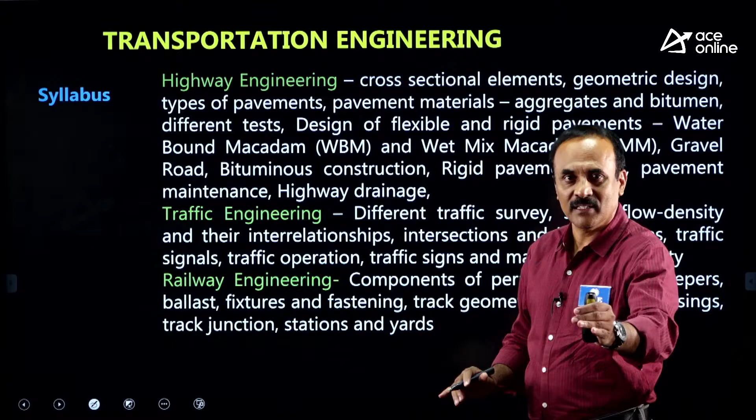Today we will discuss transportation in a nutshell. We will revise the important topics for SSC JE 24. Transportation has very good weightage for SSC JE. It is a simple subject, easy to score marks without any complication or difficulty. Compared to structural subjects, even among non-structural subjects, transportation is one of the easiest.

There may be specification and theory based questions, and a few numericals will come. Sometimes numericals may be bouncers, as a calculator cannot be used in the exam hall. So you have to be careful and skip the critical questions sometimes.

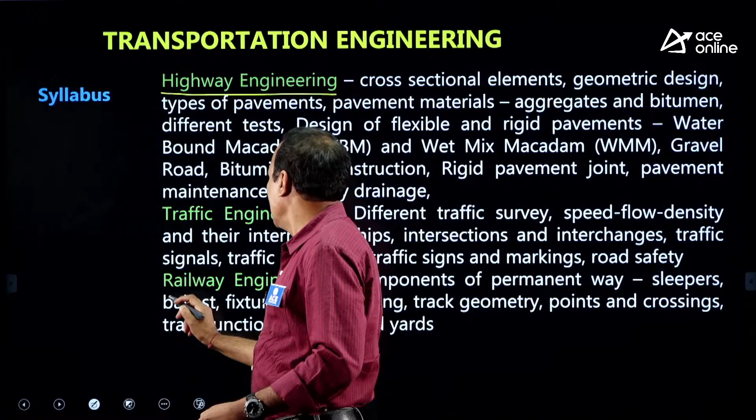Coming to the syllabus, it has highway engineering and railway engineering. Actually, traffic also comes under highway. In highway engineering we have geometric design, flexible and rigid pavement design, and highway materials. In traffic engineering, there may be 2-3 questions, as it is separately given.

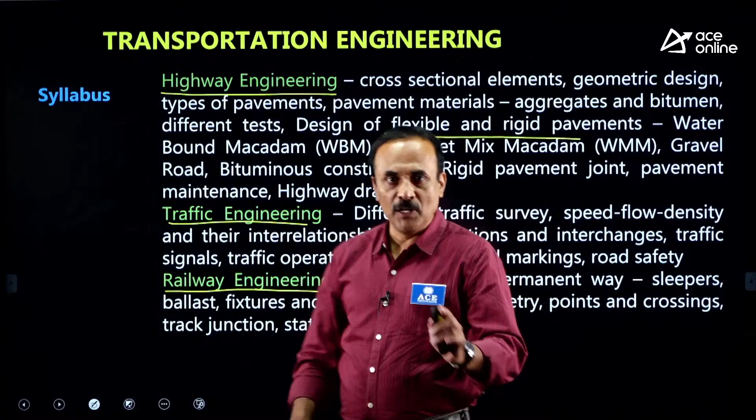Coming to railway, only the simple parts are given in our syllabus: concept of permanent way, sleepers, fixtures, track geometry. Geometric design is most important for us, and points and crossings. In the present session we will talk about highway completely.

Coming to the exam, SSC JE is a completely objective oriented exam, so you have to prepare in the same way. The level of objective questions will be slightly lower than the ESE prelims exam. There you have multiple choice questions, here also, but the level will be lower. It is slightly above local service commission exams and well below ESE prelims, because it is SSC junior engineers.

Junior engineer is a diploma based level, so you need to prepare as per the diploma syllabus. Coming to the weightages in different sets, in 2019 transportation had 7, 11, 9, approximately 10 marks, and in 2021 8, 8, 7.

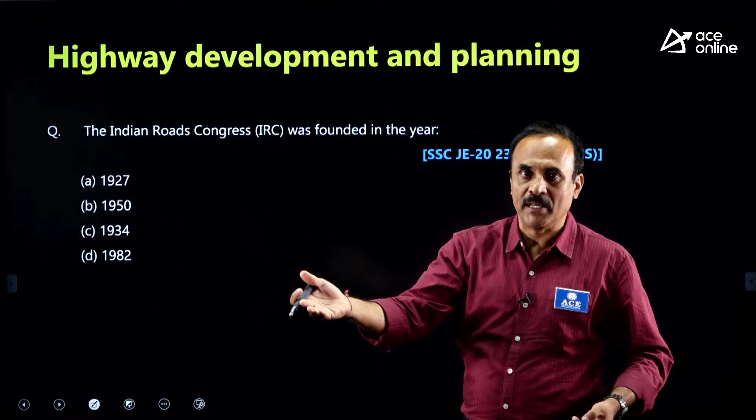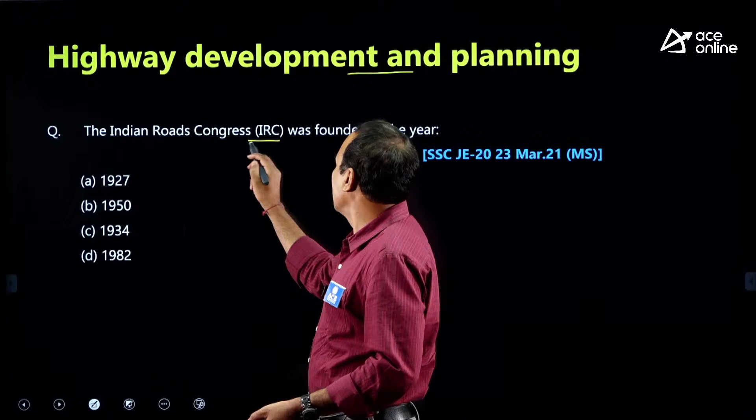First, highway development and planning, which comes under geometric design. When was the Indian Roads Congress (IRC) founded? Such year-wise facts are important, especially in highway geometric design and historical development. The Indian Roads Congress is an offshoot of the Jayakar committee. The Jayakar committee was 20 years before independence: 1947, so 37, 27.

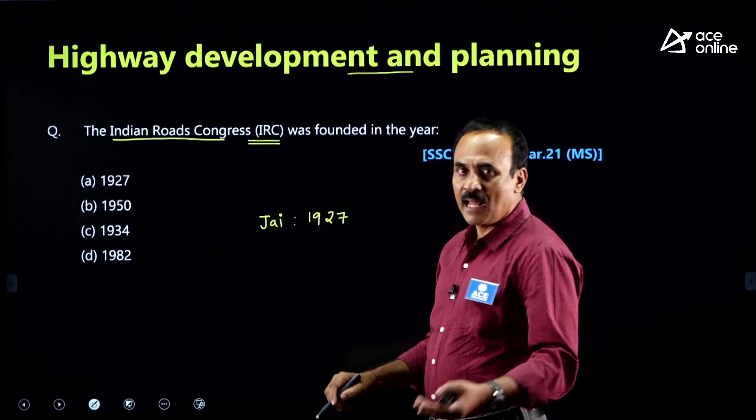The Jayakar committee gave mainly 3 recommendations. One is CRF, 2 years after, 4 years after the Jayakar committee, 1931. Next, IRC is the second recommendation, 7 years after the Jayakar committee: 27, 28, 29, 30, 31, 32, 33, 34, so 1934.

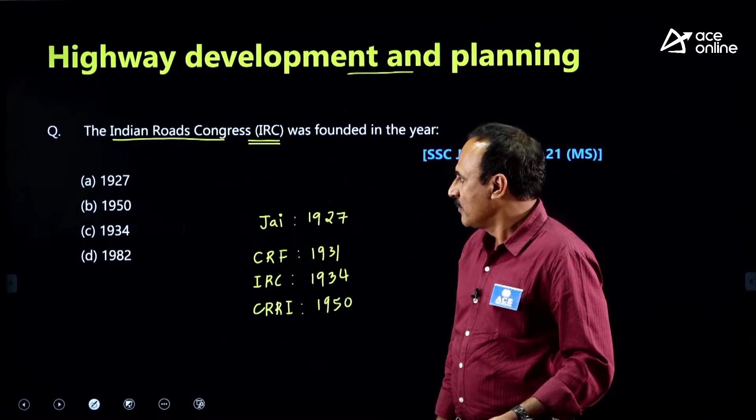Next, CRRI was also recommended by the Jayakar committee, established in 1950, the year we became a republic, 26th January, remember that. These years are very important; try to remember them. IRC is 1934; try to remember in a logical manner.

Sometimes they may ask the years also. The Lucknow plan ended in 2001, 20 years back means 1981, 91, 2001. The Mumbai plan, second 20-year plan, ended 1981, so 1961 to 81, and the Nagpur plan ended 1961, but it completed in just 18 years.

It had to complete in 1963 but completed in 61. Go back 20 years from 63: 53, 43, 1943. Between 1943 and 61 India got independence, people worked a lot and completed the target in just 18 years. Sometimes they ask these years, be careful. Lucknow plan ended in 2001.

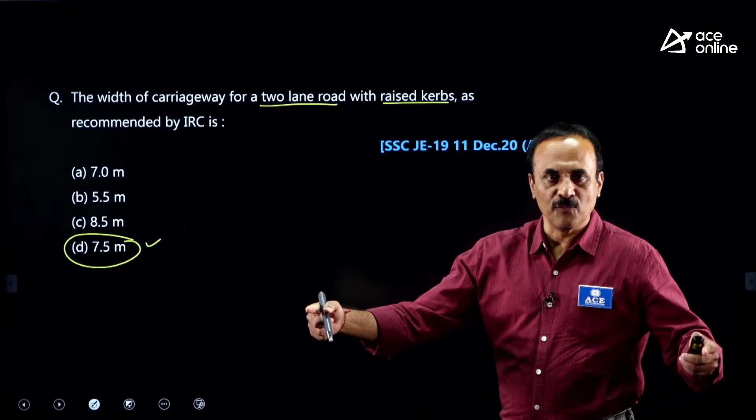Next, coming to this question, width of carriageway of a 2-lane road with raised curbs. 2-lane road with raised curbs, generally we use it on city roads with footpath, or otherwise we use it over bridges where you have the parapet wall. In that case, the width of 2-lane road is 7.5 meter. Actual 2-lane road width is 7 meter, but here as there is no access to the shoulder, we are using 0.5 meter extra.

Now, coming to this question, the sight distance is defined as what? We have different types of sight distances: stopping, overtaking, intermediate sight distance, and headlight sight distance. So, what is actually sight distance? Length of the roadway a driver can see ahead at any particular time. We go by process of elimination. Read B also, nautical distance for ships. Sight distance is nowhere related to nautical distances and nowhere related to ships, it is on road actually.

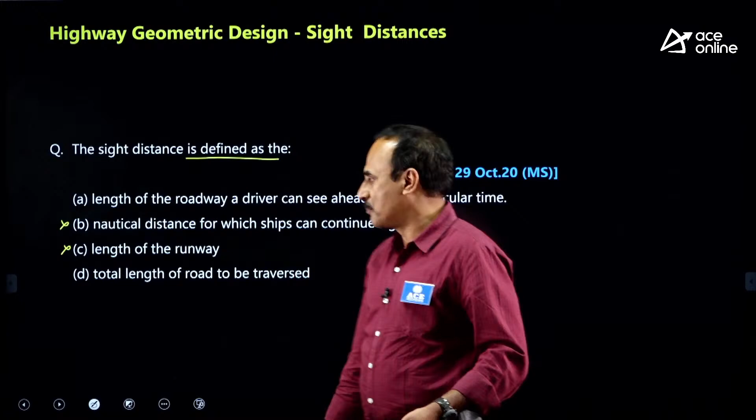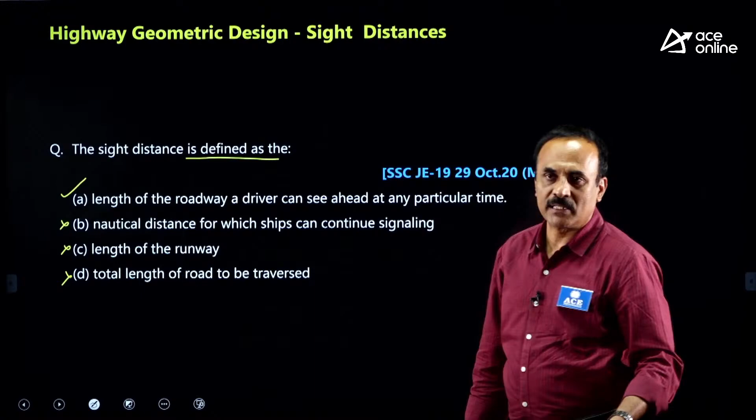Length of the runway, it is nowhere related to the airport. Now, coming to option D, total length of the road to be traversed, nowhere related to surveying. So, if you eliminate the 3 options, the best option is option A, length of the roadway a driver can see ahead at any particular point of time. So, actually the clear visible distance ahead of the driver for various operations on the road is sight distance.

Now, coming to this numerical, actually this numerical is a bouncer, takes time to solve it. So, read the question: 2 cars are moving in opposite directions with speeds 25 meter per second and 20 meter per second respectively. The total reaction time of the driver is 2.5 seconds. The coefficient of longitudinal friction is 0.35. Then what must be the minimum sight distance required to avoid head-on collision?

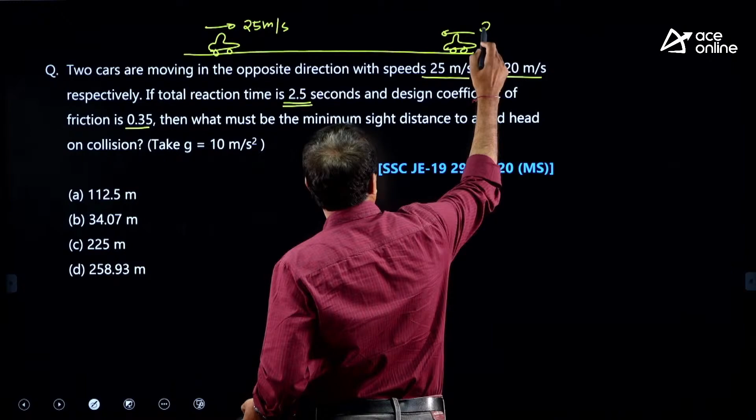2 cars are moving on the road. One car is moving like this, with a speed of say 25 meter per second, another car coming in the opposite direction with 20 meter per second speed. To avoid accident, both the cars must stop. This car should stop within a distance equal to SSD 1. This car should stop within a distance equal to SSD 2. So, total distance required to avoid head-on collision is SSD 1 plus SSD 2.

So, SSD 1 is nothing but lag distance plus braking distance. As the speed is given in meter per second, directly you can use Vt plus V square by 2gf, lag distance plus braking distance. So, here velocity of vehicle 1 is 25, reaction time is given as 2.5, plus 25 square by 2 into g, you can round it off to 10 meter per second square. f is given as 0.35.

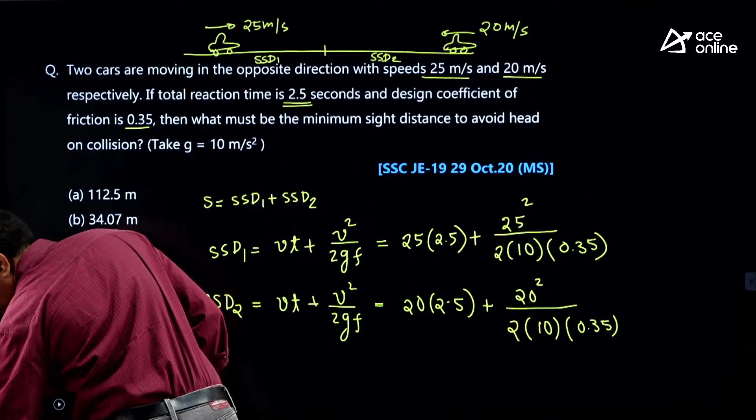In the same way, for the other vehicle coming in the opposite direction, SSD 2 is again the same equation, substitute all the data, but only the velocity is changing here, 20 into 2.5, plus 20 square by 2g; actual acceleration due to gravity is 9.81, I am using 10 for easy simplification. So, if you add it and simplify, it would be 258.93 meter. So, answer is option D.

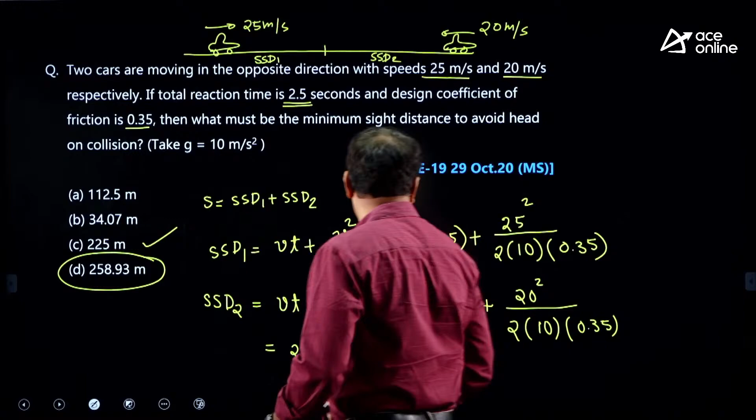But to simplify this without calculator is a nightmare. Such lengthy questions without calculation, it is difficult to simplify. In that case, you just leave the question, jump to the next question.

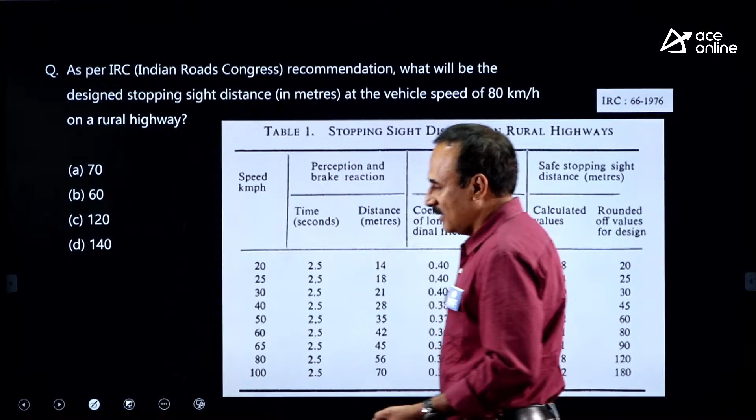Now, coming to the next question, as per IRC, what will be the design stopping sight distance in meter for a vehicle of speed 80 km/h on rural highway? This is again memory oriented, as per IRC, Indian Roads Congress. Indian Roads Congress has given the SSDs for different speeds that you need to remember. That is given in a table form in IRC 66, 1976. Remembering this table is difficult, but try to remember things like this.

Speed 20 km/h, last column, the rounded values of safe stopping sight distance: 20 km/h, 20 meter; 25, 25; 30, 30; 40 km/h, slightly different here. For 40 km/h speed, 45 meter is required. For 50 km/h, 60 required. For 60, 80; 65, 90; 80, 120; 100, 180. So, presently they are asking for 80 km/h speed. 80 km/h speed means 120 meter. So, answer is option C.

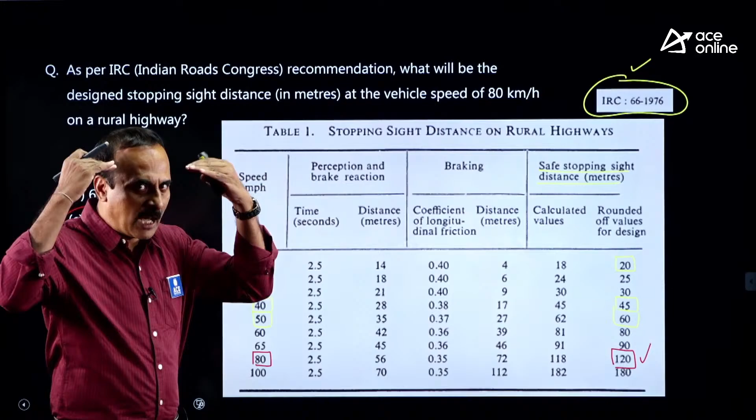This is a very common question. If you have good memory and space to store things in your brain, try to memorize it. If space is not there, delete unnecessary things from your brain and try to memorize this, it's important for exams. Especially in SSC JE exams and all, these memory oriented questions are important for us.

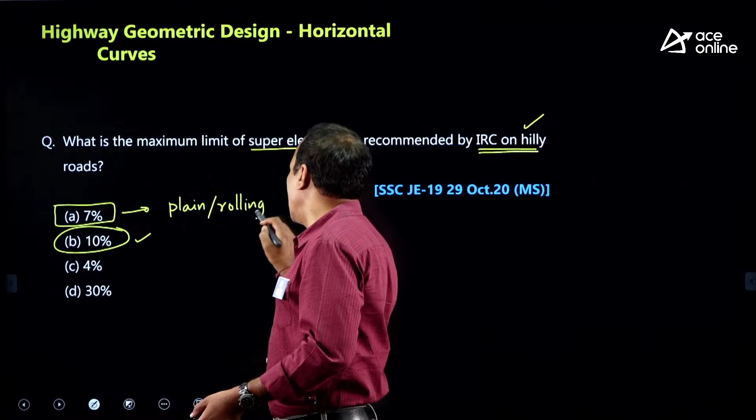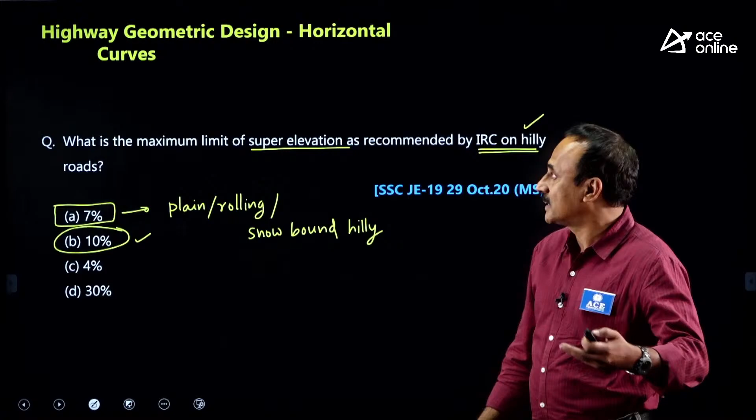Now coming to the next question: what is the maximum limit of super elevation as recommended by IRC in hilly areas? In hilly roads, maximum super elevation is 10%. This is by IRC. In plain and rolling terrain, even snow bound hilly terrain, we use 7%. That means in winter there is a chance of snowfall on the hills, so we use 7% as the maximum super elevation limit. For normal South Indian hills where there is no chance of snow, you can go up to 10% as the maximum super elevation. So presently our answer is option B.

Coming to the next question: for a hill road with a ruling gradient of 6%, what will be the compensated gradient at the curve of radius 60 meters? They are asking you the compensated gradient. First you calculate grade compensation. The grade compensation as per IRC is given by 30 plus R by R, an empirical formula, otherwise 75 by R, whichever is least.

Radius is 60 meters. So 30 plus 60 is 90 by R, and this is 75 by R. So the least will be this one, so we will substitute only this here. 75 by 60 is nothing but 1.25%. Directly grade compensation comes in percentage.

Now compensated gradient is equal to actual gradient minus the grade compensation. Compensated gradient means whatever gradient you want to provide on the road after compensating it, after giving the discount. Original gradient is 6 minus 1.25, if you deduct, then what will this be? 4.75. They are asking you the compensated gradient, it is 4.75%, option B.

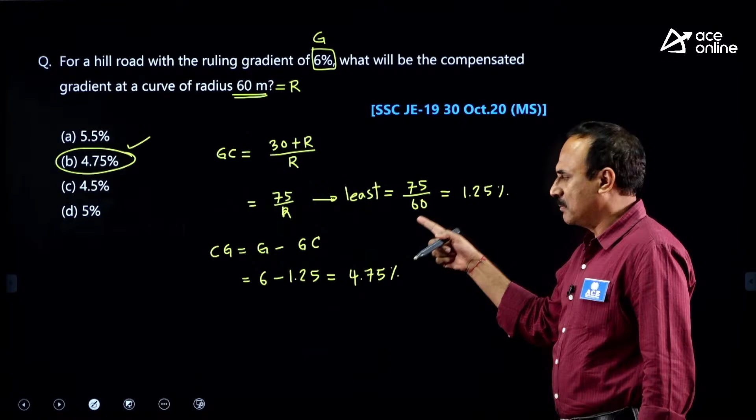You have to be careful about the simplification of this. This you can do, not a big problem. You can easily calculate within time, without a calculator also.

Now coming to the next question: the horizontal highway curve, the width of the highway is 10 meters, and the outer edge is 40 centimeters higher with respect to the inner edge. Then the super elevation - actually the pavement is rotated like this. Width is 10 meters, rise is 40 centimeters, meaning 0.4 meter. This is the super elevation.

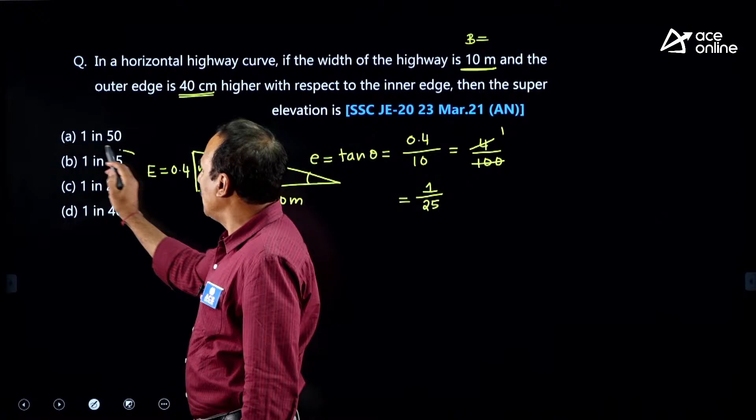Super elevation is tan theta, the slope. Tan theta is 0.4 by 10, otherwise 4 by 100. 4 by 100 is nothing but 1 by 25. So the slope is 1 in 25. The super elevation is 1 in 25. The rise of the outer edge of the pavement with respect to the inner edge, we call it super elevation.

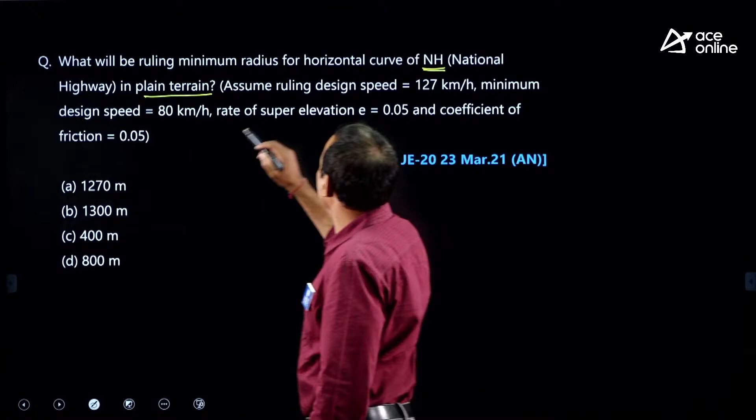A simple question, without a calculator you can do it. What will be the ruling minimum radius for a horizontal curve of a national highway in plain terrain? Assuming design speed is 127 kmph, minimum design speed is 80 kmph, rate of super elevation is 0.05 and coefficient of lateral friction is 0.05. So they are asking you the ruling minimum radius. Ruling minimum radius is based on ruling design speed. It is based on ruling design speed.

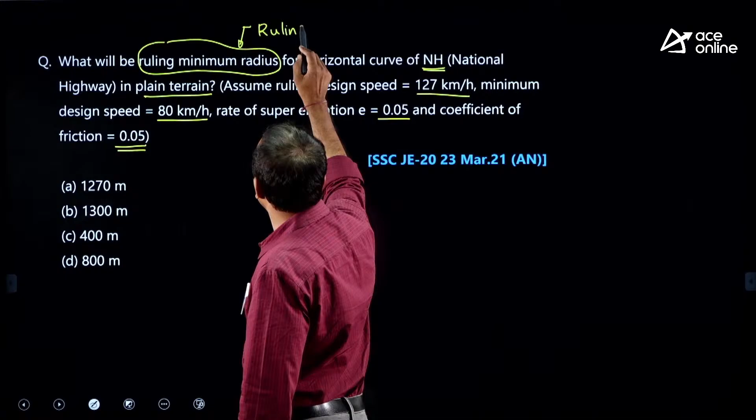Ruling design speed is nothing but the upper limit of speed you can achieve on the road. It is 127 kmph. So this minimum design speed is not required for us.

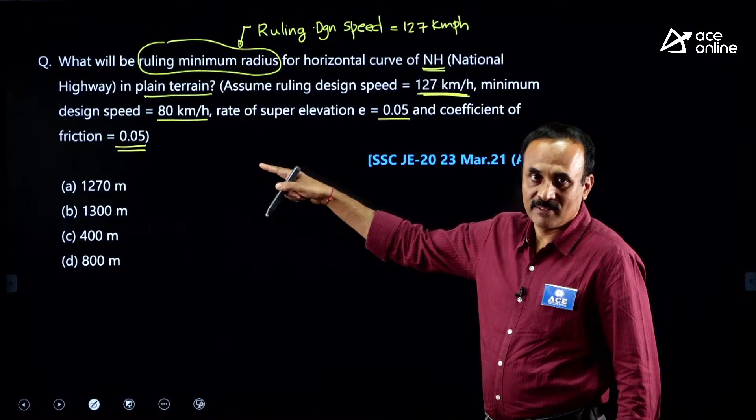So I try to use this version for easy simplification. Super elevation is 0.05, friction also 0.05 given, together 0.1. 0.1 can be taken as 1 by 10. V square, V is how much? 127 square, that is 127 into 127.

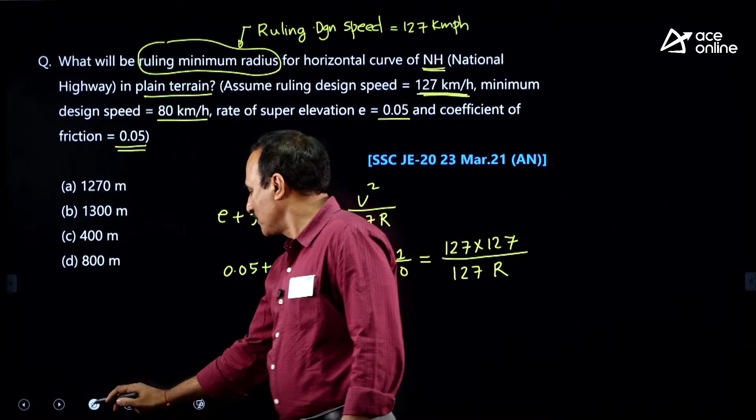Divided by 127 R, easy to simplify, you see. This 127 gone, then R will be 127 into 10, that is 1270 meter. So what is the radius? Option A. Simple question only, but little calculations and little simplification are required.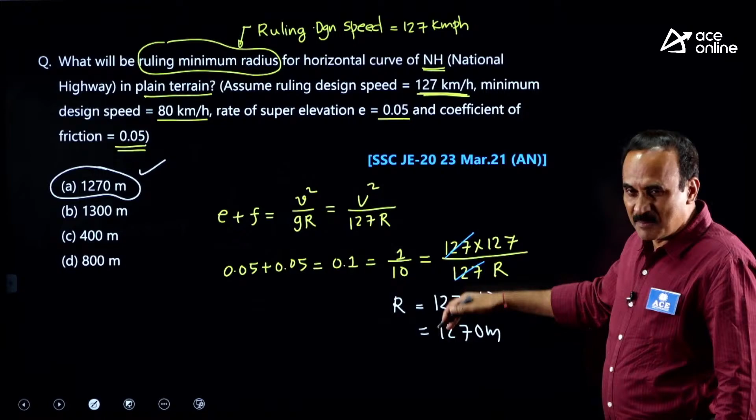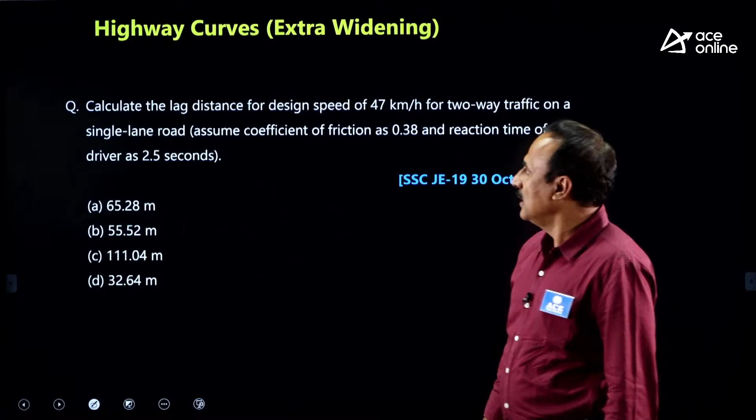Formula also you need to remember. Now coming to the question on extra widening - it is not on extra widening. Calculate lag distance, it is based on SSD only.

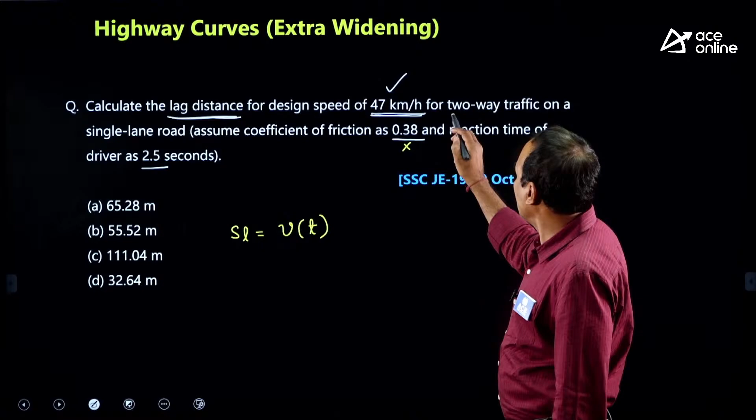Lag distance for a design speed of 47 kmph on a two-way traffic single lane road. Assume coefficient of friction as given and reaction time as 2.5. Lag distance, you remember, is equal to V into T, that is it. So the coefficient of friction is extra data, only to confuse you they have given it, and two-way traffic and single-lane road, these are all extra data given to confuse us.

So the speed here is 47 kmph, you convert into meter per second by multiplying with 5 by 18. 47 into 5 by 18 gives meter per second, into reaction time 2.5 seconds. Simplify, you get the answer - it would be 32.64 meter, that is option D.

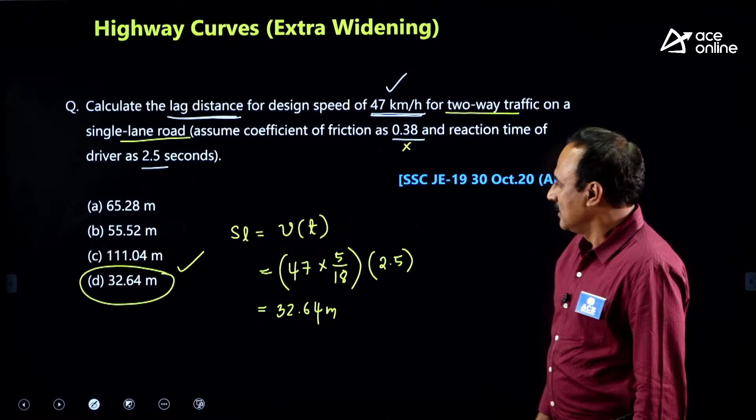Slight calculations are required here. Now look at the next question. A vehicle has a wheelbase of 5.5 meter, L is 5.5 meter. What is the off-tracking negotiating a curve with mean radius 31.5 meter? Take width of pavement as 3.5 meter - actually width of pavement is not required for us.

Off-tracking is nothing but W naught, it is L square by 2R, just that. Off-tracking is W naught equals L square by 2R, mechanical widening is N into L square by 2R. Be careful about it. Off-tracking is just L square by 2R, mechanical widening is N into L square by 2R, where N is the number of lanes of the road. L is given as 5.5 into 5.5, that is 5.5 square, radius is 31.5.

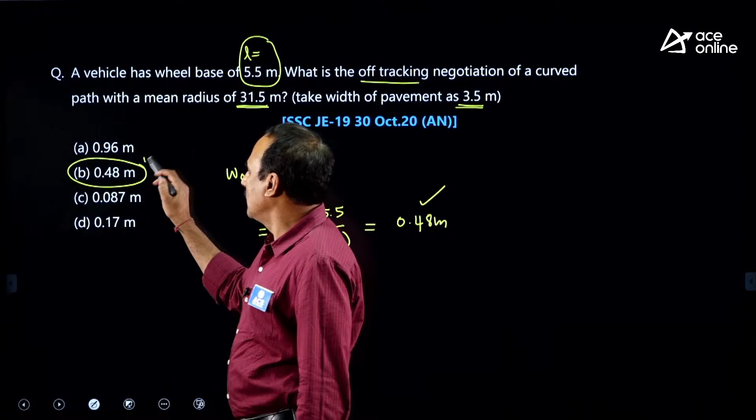You need to simplify. It is around 0.48. Simplification is required, 0.48 is the answer. Answer is option B. Okay, please.

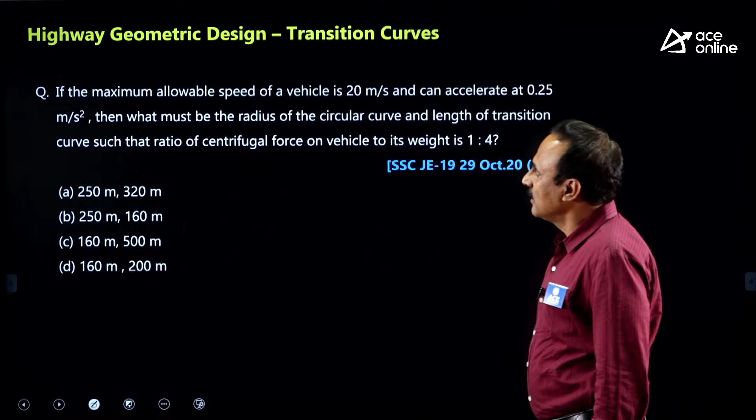Next question: the maximum allowable speed of a vehicle is 20 meter per second and it can accelerate at 0.25 meter per second square. What must be the radius of the circular curve and length of the transition curve, such that the ratio of the centrifugal force on the vehicle to its weight is 1:4?

So they are asking two things here: one is the radius of the circular curve, such that the centrifugal ratio P by W is given as 1/4. Actually P by W is V square by GR, you remember. Otherwise V is small v meter per second, speed 20 meter per second is given, directly you can substitute.

So V square, 20 meter per second into 20 meter per second, G you can take as 10, radius you can find out using 1 by 4. So radius of the curve: 4 goes here, zeros cancel, 20 into 2 into 4, 8 into 2, 160 meter.

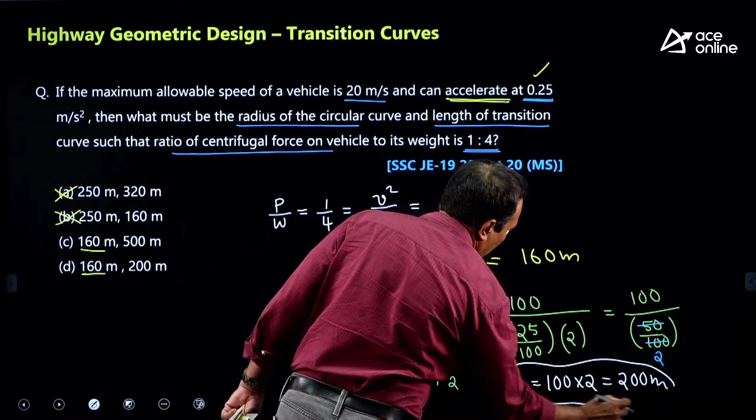You can simplify now: 50, 1, 2, so 200. LS will be the answer, you can pick it up now: 200 meter, 160 meter. With only 160 it is not possible to pick up the answer. Even though the question seems lengthy, simplification is easy, not that difficult. Even I am simplifying it, so you can definitely do it. Simplification is easy here; the time taken to get speed comes with practice, generally from test series and such.

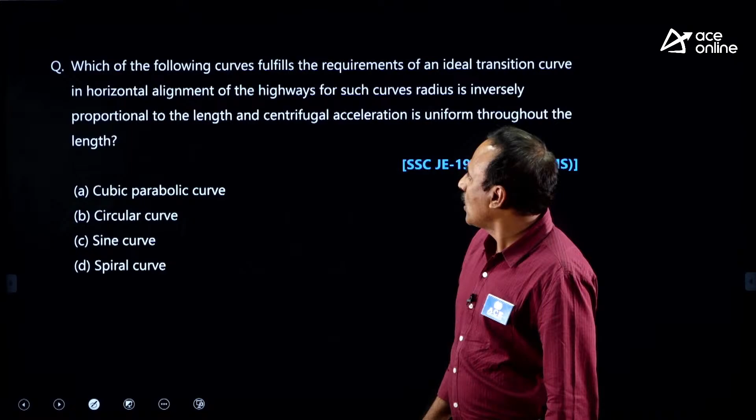Now coming to the next question: which of the following curves fulfill the requirement of an ideal transition? Ideal transition as per IRC is the spiral curve, spiral or clothoid or Glover spiral, for highways. For highways, the ideal transition is spiral. For railways, the ideal transition is cubic parabola.

You need to read the question properly and then pick up the answer. For railways, ideal transition is cubic parabola; for highways, ideal transition is spiral. Look at the question: a 2-lane road with a design speed is given, has a horizontal curve of radius 400 meter. What will be the super elevation required with mixed traffic?

Mixed traffic means it is design super elevation. Especially in design, what IRC says is you need to use 75% of the speed to be balanced by the super elevation. This is small v, 0.75 v whole square by gr. Otherwise, if you convert this into kmph, it is v square by 225 r.

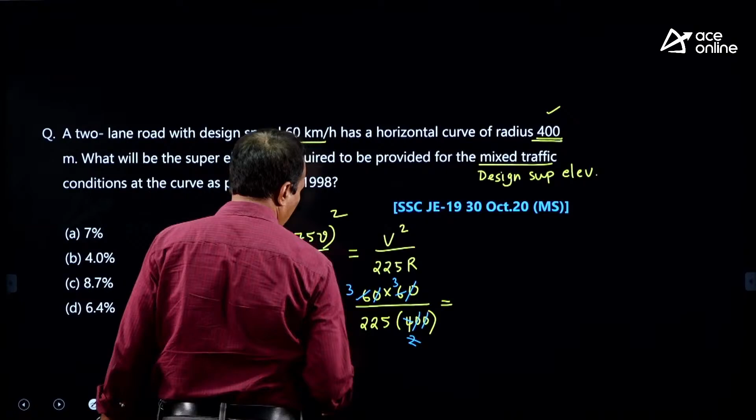So substitute these values: V is 60, so 60 into 60 by 225, radius of the curve is 400. If you simplify, cutting the zeros, 3, 2, 2, 2, 1, 3, 225 is there, it comes to 0.04, nothing but 4%. Answer is option B.

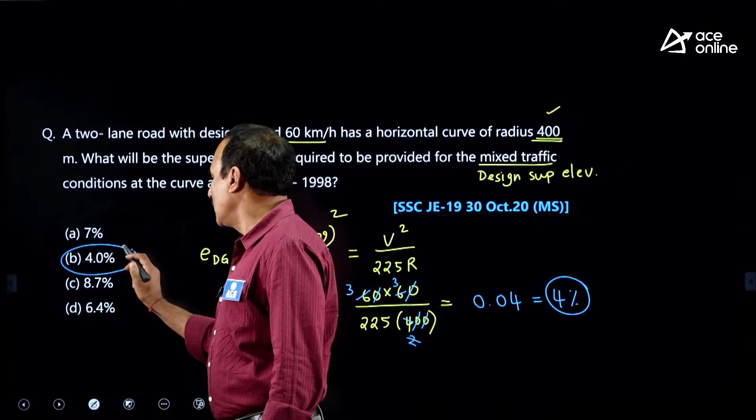Slight critical step in the simplification here. Now coming to this question on summit curves: there are two gradients, G1 is 1.2, G2 is downward minus 0.8 gradient. The deflection angle is the algebraic difference of the two gradients, plus 1.2 minus minus 0.8, minus of minus is plus, so deflection angle is 2%. They are saying rate of change of gradient is 0.1% per 20 meter, equal to 1 chain.

Point 1% gradient, 1 chain; 1% gradient, 10 chains. We have 2% gradient, so for 2% gradient, 20 chains. So, 20 chains will be our length of the summit curve. Okay, simple interpolation.

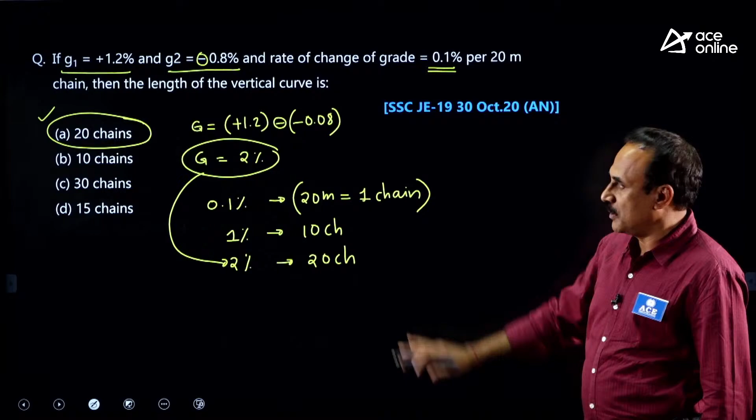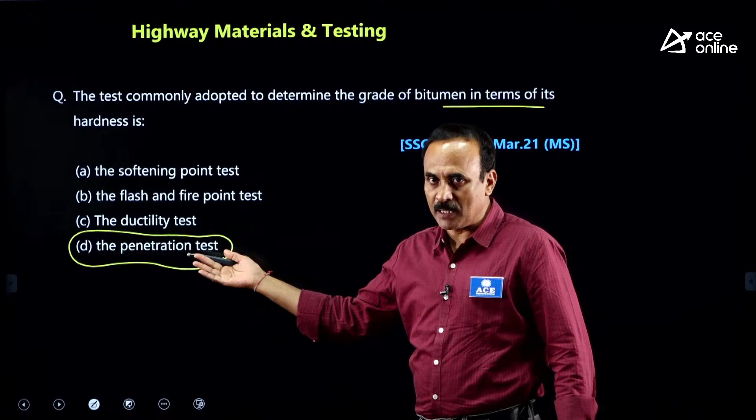Look at the question. The test commonly adopted to determine the grade of bitumen in terms of hardness is? The grade based on hardness is the penetration grade, which is determined by the penetration test. There is another gradation called viscosity grade, based upon the resistance to flow. So, based upon hardness, gradation is given with the help of the penetration test, a direct question.

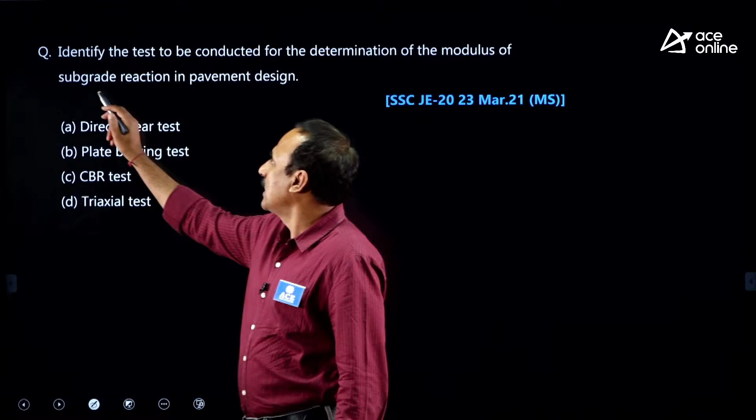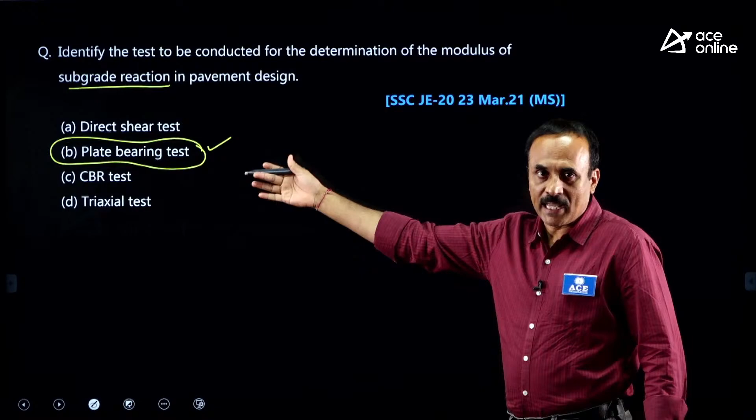Next, identify the test to be conducted for determination of modulus of subgrade reaction. Modulus of subgrade reaction can be found by the plate load test or plate bearing test. Modulus of subgrade reaction and Young's modulus of the soil can be calculated by the plate load test. Even bearing capacity can be calculated by the plate load test. Through the plate load or plate bearing test, you can calculate bearing capacity, modulus of subgrade reaction and Young's modulus of the subgrade soil.

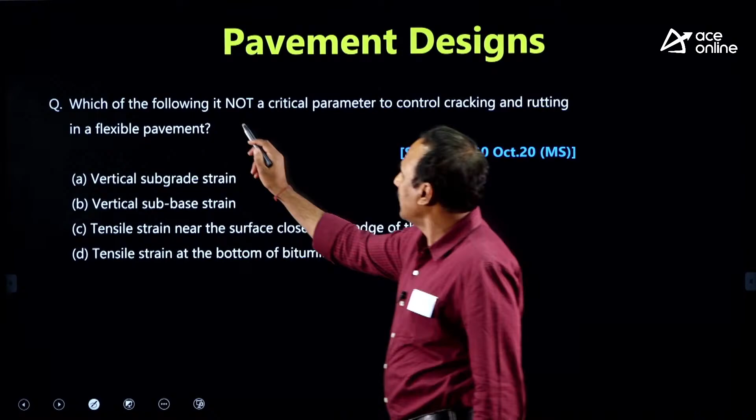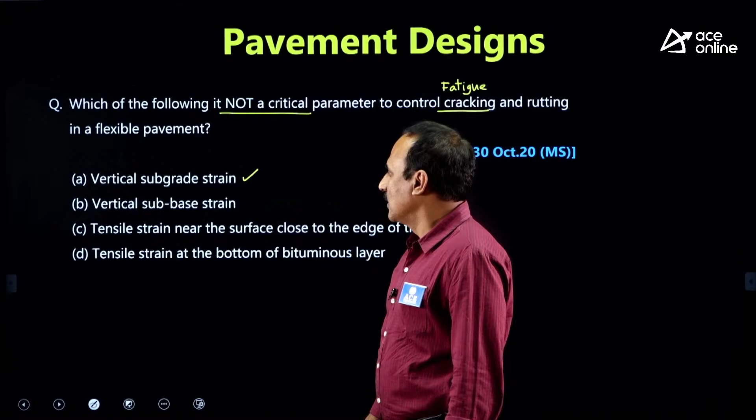Which of the following is not a critical parameter to control cracking and rutting of flexible pavement? Cracking is due to fatigue action. So, they are saying fatigue plus rutting. Fatigue is based on tensile strain at the bottom of the bituminous layer. So, which of the following is not a critical parameter? Vertical subgrade strain is responsible for rutting. Vertical subbase strain we do not consider anywhere.

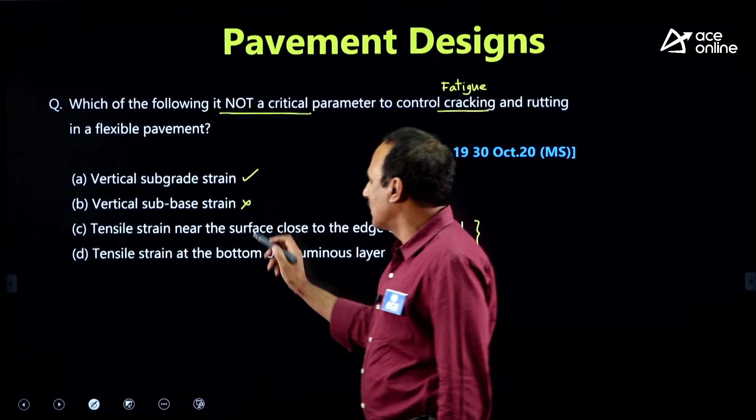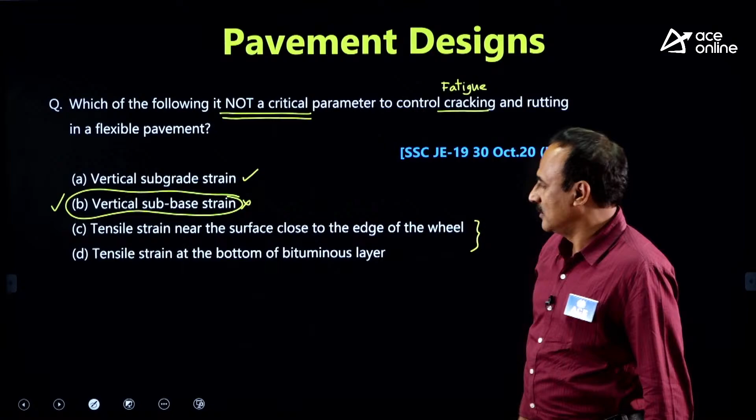Tensile strain near the surface close to the edge of the wheel, and tensile strain at the bottom of the bituminous layer, we consider in fatigue action. So, vertical subbase strain we do not consider. So, the answer is option B, which is not considered for fatigue plus rutting. Go to the next question.

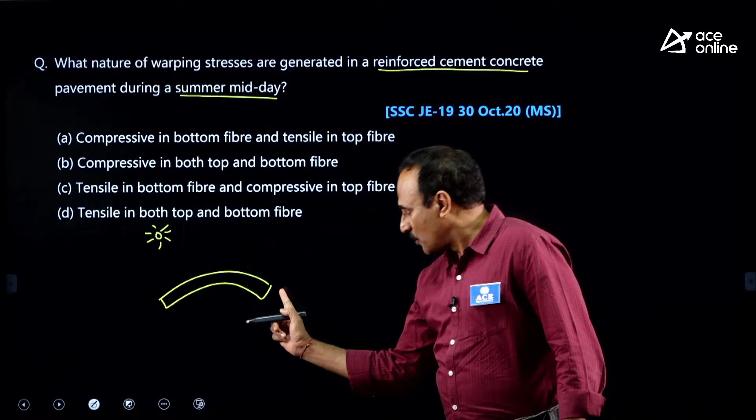What nature of warping stresses are generated in reinforced cement concrete pavement during summer midday? During summer midday, temperature at the top will be high compared to the bottom. So, the pavement wants to warp like this due to the heat of the sun rays. The top layer experiences more temperature than the bottom layer, so the top layer's length becomes more than the bottom layer's length. The pavement wants to warp, but the self-weight of the pavement prevents this warping and presses it back to the original position.

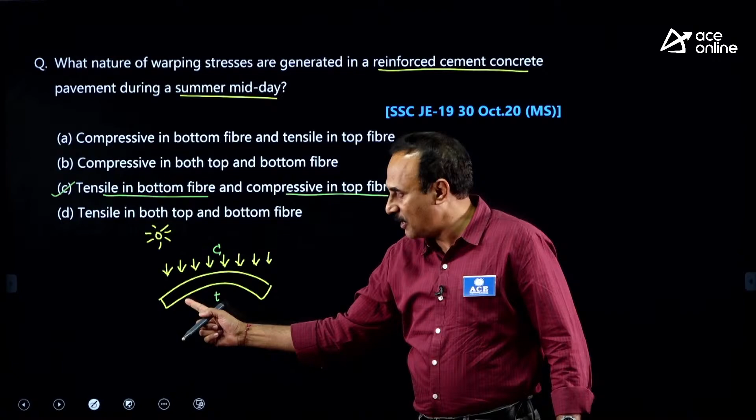Once it presses back to the original position, the bottom of the slab will be under tension and the top under compression. So, what is the answer? Tensile in bottom fiber and compressive in top fiber. Do not treat it like hogging, tension top, compression bottom; it is not like that. The pavement wants to warp, but the self-weight prevents it. If there were no self-weight, the pavement would warp and there would be no stress. That is why the bottom is under tension and the top under compression.

So, the nature of stresses due to temperature warping will be opposite to the actual stresses you experience by direct loading. Try to remember this point. The pavement wants to warp, but self-weight is stopping it. As warping is prevented, we get stresses: tension at the bottom, compression at the top.

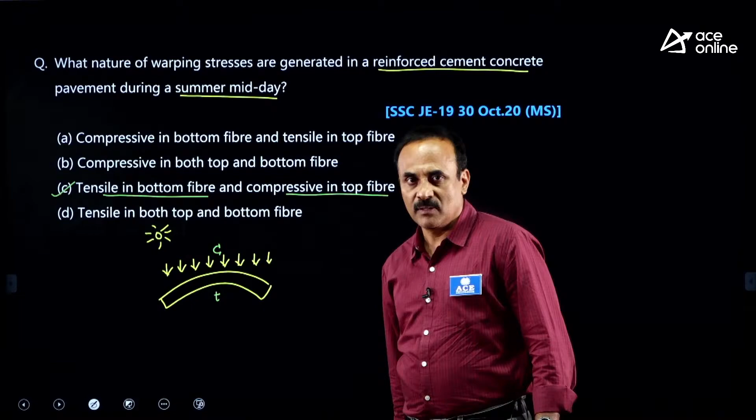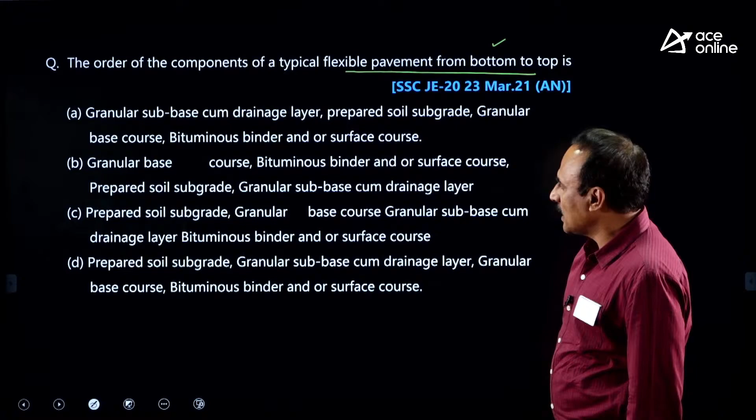Now, coming to this question, the order of the components of a typical flexible pavement from bottom to top. At the bottom we have subgrade. Here granular base, granular subbase, this is no way. Bottom most is subgrade, so the answer is either C or D. After subgrade you have granular subbase course actually. So, this is correct, and this one is wrong.

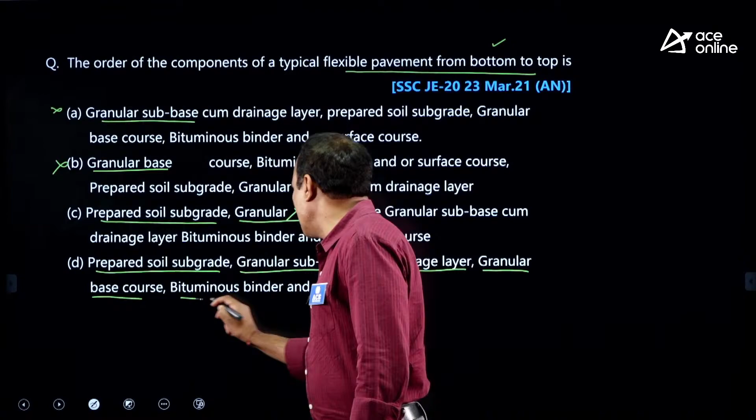Granular subbase works as a drainage plus filter layer. Over that granular base course, over that bituminous binder course and then surface course. Sequence D is correct. So, over the subgrade soil we have granular subbase, then base, then the wearing course comprising two layers: the binder course in the lower part and the surface finishing course in the upper part.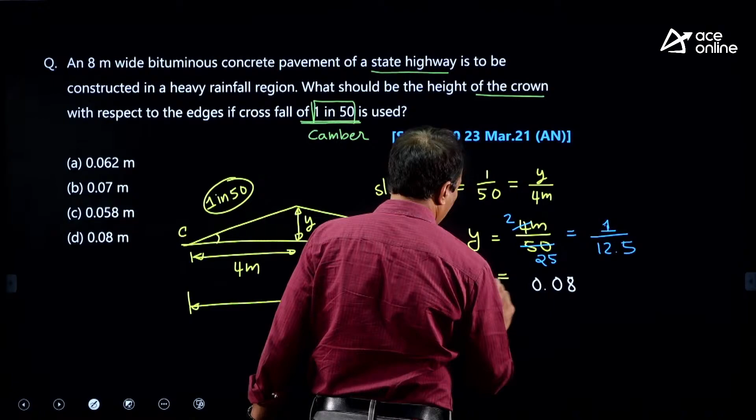How much? 4 by 50, 2 2's are 4, 2 25's are 50. 1 by 12.5. 1 by 12.5 is 0.08. Like this. So, answer is 0.08 meter. Simplification requires little time here. Okay.

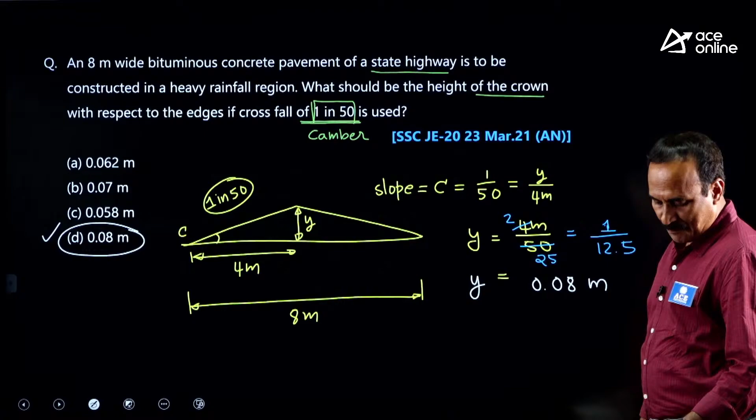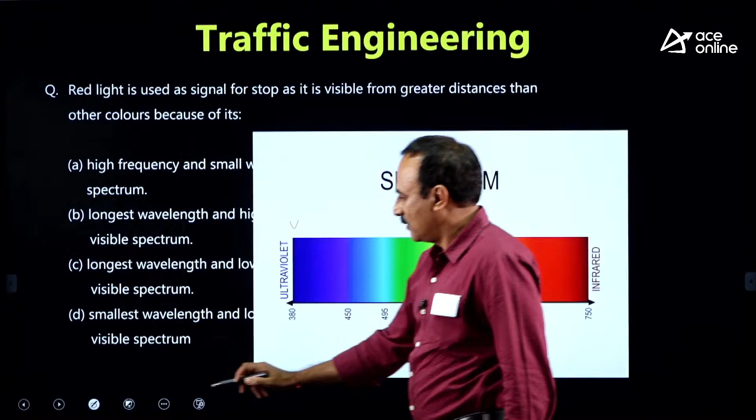Come to the next question. This is from traffic engineering. Red light is used as a signal for stop, as it is visible from greater distance. Generally, red is visible from a long distance than other colors because of its, actually speaking, you can look at this next slide. You see here, this is the spectrum. V, I, B, G, Y, O, R, 7 colors, starting with violet and red. If you look at the wavelength,

the red is having high wavelength, 750 nanometer, violet is having 380 nanometer. Less than violet we call it as ultraviolet, more than red we call it as infrared rays. Infrared rays are dangerous, ultraviolet also dangerous. So, these colors are okay.

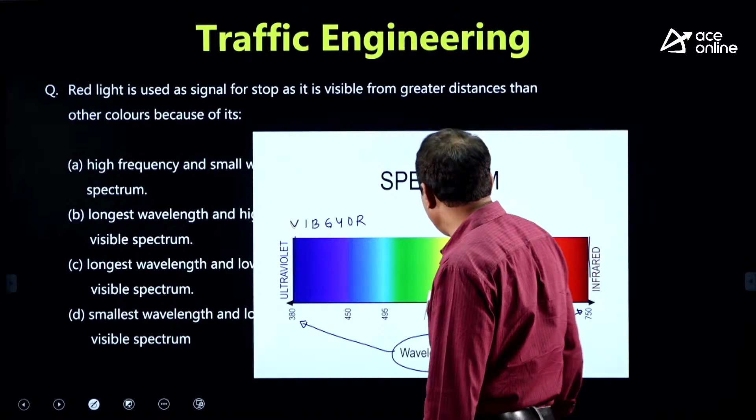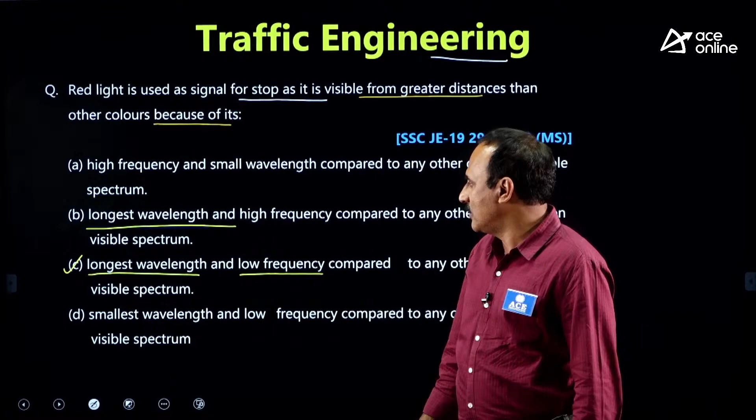Now, coming to the options, red is having longest wavelength and low frequency, not high frequency. If wavelength is high, frequency will be low compared to any other color in the visible spectrum. So, answer is C. If wavelength is high, frequency will be low. Okay.

Look at the next question. In which type of traffic signaling system do signals along a given road show the same indication? Same indication means along a road there are so many junctions. At all the junctions you have the same color. Here red, here also red. After some time if it is yellow, everywhere yellow. If it is green, everywhere green. With a single switch you can control all the signals at once, that we call the simultaneous system, controlling all the signals of that street at the same time.

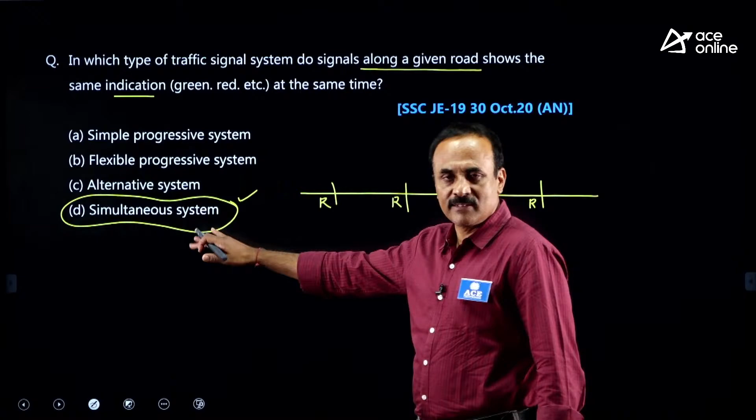Alternate means here red, next is green, next red, next green, that is called alternate system. So, simultaneous system is the most inefficient system; easy to control is always inefficient. If you are an easy going person, you are an inefficient person. Like that, simultaneous system is easy to operate, easy to control, but not efficient at all.

Now, coming to this next question, which type of transportation survey? The vehicles are stopped on a sampling basis and information is collected. Vehicles are stopped and then information is collected, not taxi survey. If tags are there on vehicles like FASTag, there is no need to stop, the vehicle can be scanned and go away.

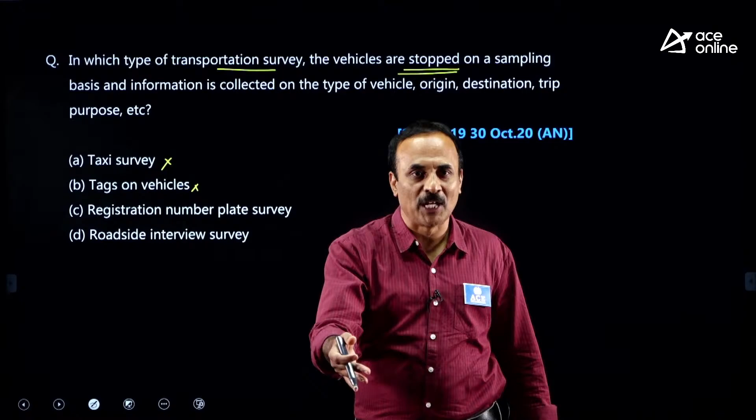Registration number plate survey: just by looking at the number plate from a distance without stopping the vehicles, you can note down the registration number and allow the vehicle to go. So, no need to stop the vehicle in registration number plate survey.

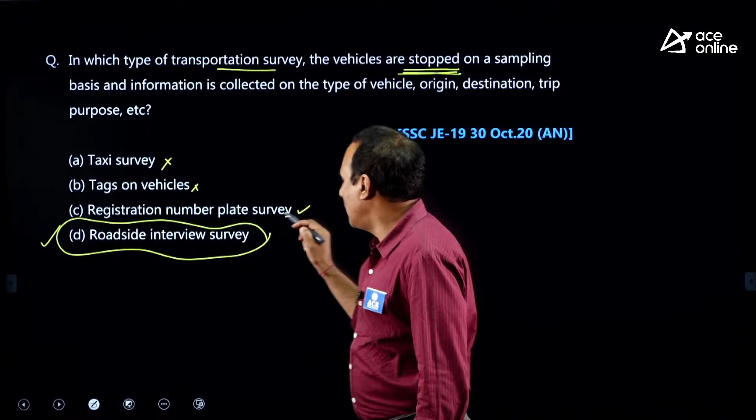Roadside interview method: in roadside interview survey you need to stop the vehicle and ask the driver and passengers how is your journey, how is your road, how do you feel, like that you can ask questions. There you need to stop the vehicles. So, answer is option D, all other options are not correct. Just by process of elimination you can pick up the right option.

Now, you see here, select the correct match of the signals. Regulatory signs, nothing but mandatory signs, compulsory signs. You must compulsorily follow. Like prohibitory signs. Prohibitory signs means right turn prohibited, left turn prohibited, U-turn prohibited, you must compulsorily follow. Right turn prohibited, if you take a right turn, then police will come and fine you, that is mandatory. So, 1 should match with A, oh, 3 options it is there.

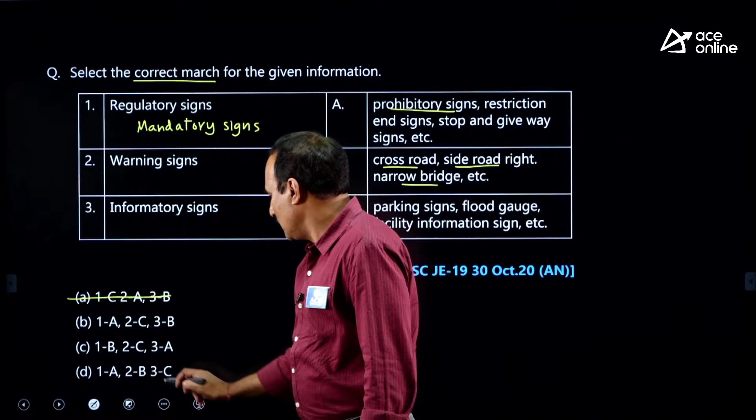Next, warning sign. Warning sign just gives you warning, like cross road ahead, side road ahead, narrow bridge ahead, that gives you just warning that there is a narrow bridge ahead, driver feels alert with this. So, 2 should match with B, means this is wrong, this is also wrong, only you have this option. Let us see informatory sign is correctly matching or not.

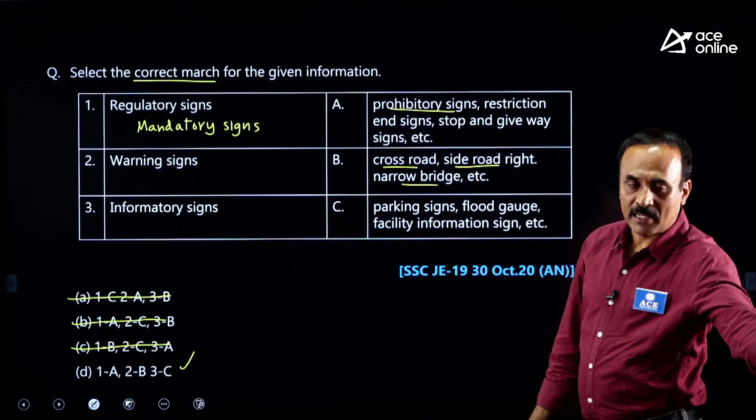Information sign: parking signs, parking right side, yes, that is an information. If you want to park, you can park it, otherwise you can go ahead. Flood gauges, flood gauges means flood level in a rainy season, that is information. If flood level is up to certain height and if you park your vehicle there and go away, and if suddenly flood comes, your vehicle may also be flooded away.

So, facility information like hospital ahead, telephone booth ahead, these are all facilities that will be informed. No need to read, that just gives you information. So, correct, 3 is matching with C only. Answer is option D. By process of elimination, theory questions can be picked up with the right answer.

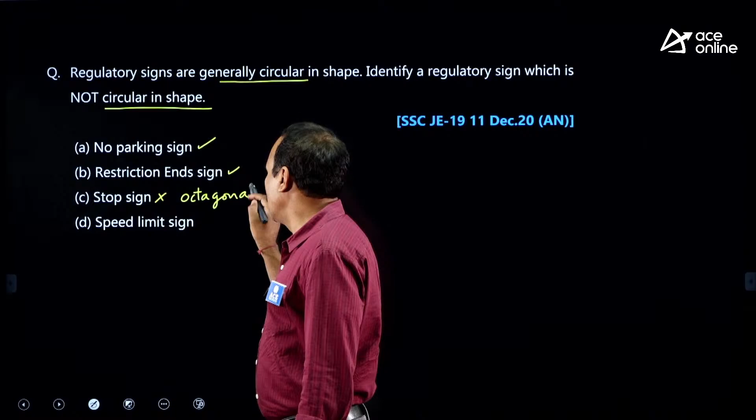Now, coming to the next question. Regulatory signs are generally circular in shape, especially speed limit sign, all these regulatory or mandatory signs are circular in shape, except stop sign and give way sign. Stop sign is octagonal, give way sign is inverted triangle, which is not in circular shape. No parking is circular, restriction end sign is circular, stop sign is not circular, it is octagonal. Speed limit sign also circular. So, answer is option C. Stop sign is octagonal. There is one more regulatory sign which is not circular, give way sign, that is inverted triangle.

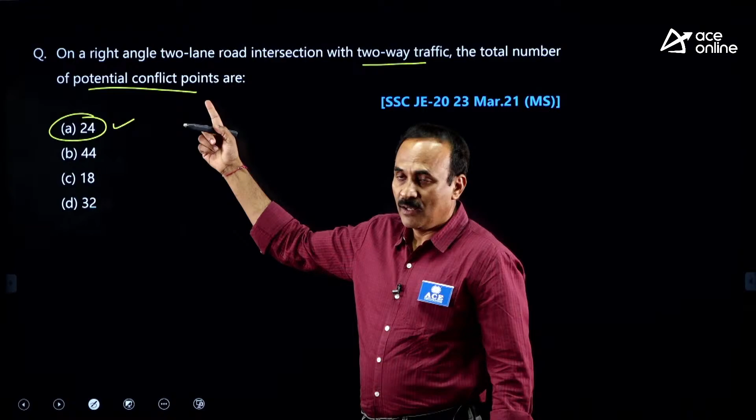Right angle two lane road intersection with two-way traffic: the total number of potential conflicts for two lane two-way is 24. Memory oriented question. So, in case of two roads meeting, one is two-way, one is one-way, then number of potential conflicts are 11. If both the roads are one-way, potential conflicts are 6. One road is one-way, one road is two-way, potential conflicts are 11. Both the roads are two-way is 24. Try to remember this. So, these are all a type of probable questions which may come in SSC JE.

We have just gone through the things in brief. So, similar questions you need to practice. Especially what you need to observe is speed is required, accuracy is required, read the question properly, answer the question sometimes with process of elimination. So, these points are important for your success. Try to follow the things, practice number of questions, take many test series. Definitely with improved speed you can achieve the target whatever you want.